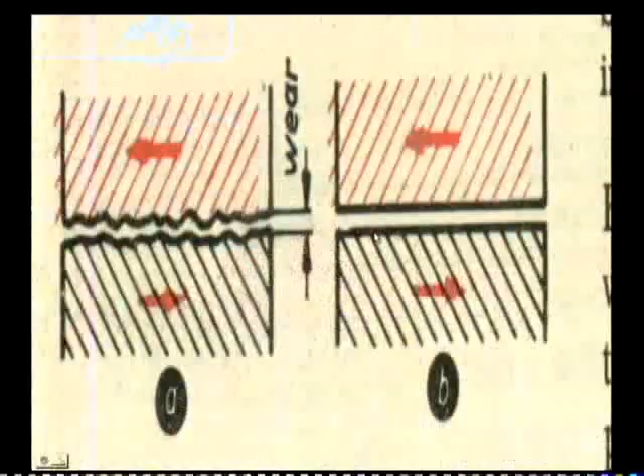That is why we have to switch over to some fine finishing processes after grinding. What are these processes? There are basically three types: lapping, honing, and super finishing. These bring excellent tolerance and accuracy, and also the type of fit required between the two parts. Let us study these processes one after another.

Now, lapping. Lapping is an abrading process used to produce geometrically true surfaces, correct minor surface imperfections, improve dimensional accuracy, or provide a very close fit between two contact surfaces. So lapping is basically a metal removal process, called an abrading process, that produces geometrically true surfaces — whatever trueness is required, be it flatness or roundness, is obtained, along with correction of minor surface imperfections.

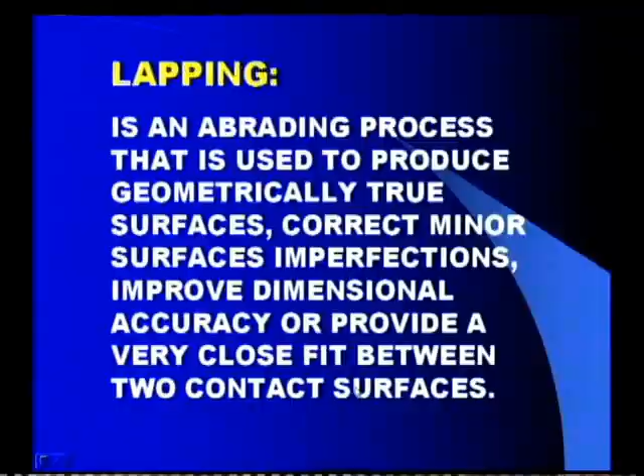The minor surface imperfections observed even after grinding, and also after honing which we will study a little later, including the marks left by the tool after honing, are corrected by lapping. It also improves dimensional accuracy and provides a very close fit between two contact surfaces. This is the application, or rather the advantage, of lapping.

Now what is obtained by lapping? Very thin layers of metal, about 5 to 10 microns, that is 0.005 mm to 0.01 mm, are removed in lapping. The lapping pressure is generally kept in a range of 0.01 to 0.2 newtons per millimeter square — a very small pressure applied by the lapping stone on the surface being lapped. That's how it becomes a fine finishing process.

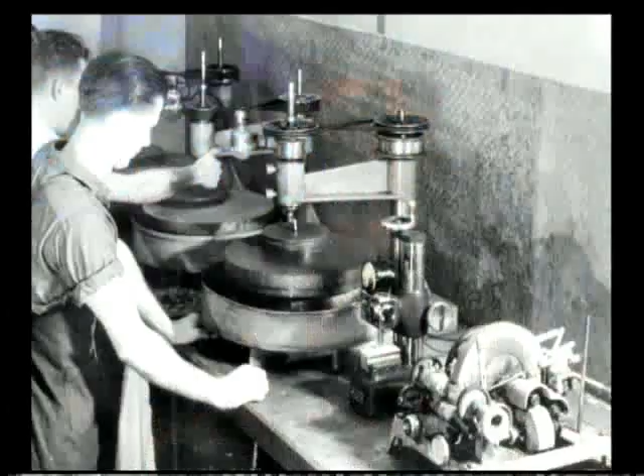Apart from this, there are also other advantages. You can see this figure where lapping is being done on a machine. This lapping tool may machine flat surfaces, or it may be applied on round surfaces also. In this figure you are seeing a flat surface being lapped; similarly, different surfaces can also be lapped.

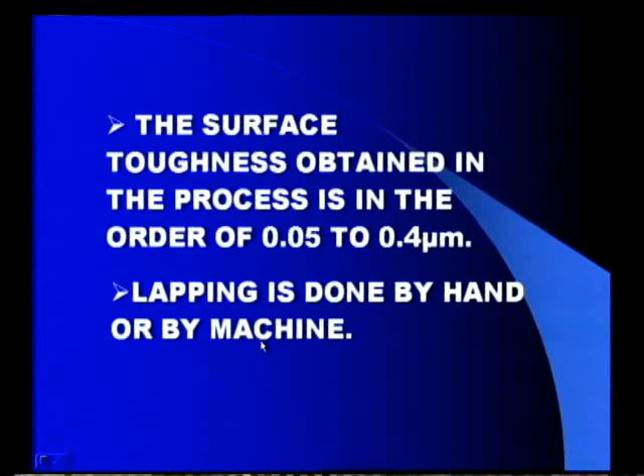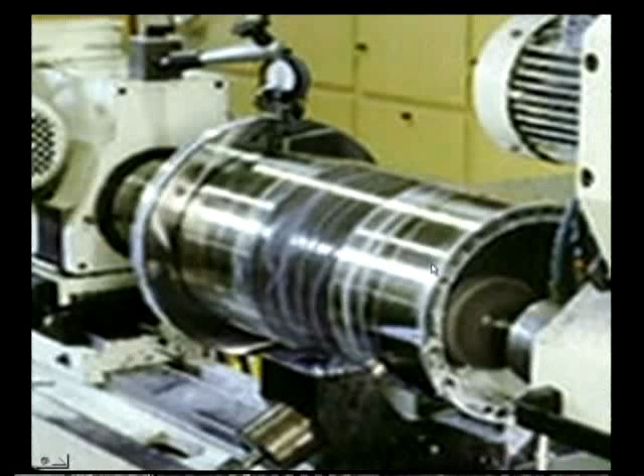In this figure, the cylindrical workpiece is getting lapped using a lapping stone, applied on and off onto the surface. The workpiece rotates while the lapping stone is applied, with two types of feed given: longitudinal and cross feed. This is how cylindrical parts also get lapped on machines.

These are some of the advantages you can observe on a lap. The first advantage is that less heat is generated, and hence there is no distortion of the work surface after lapping.

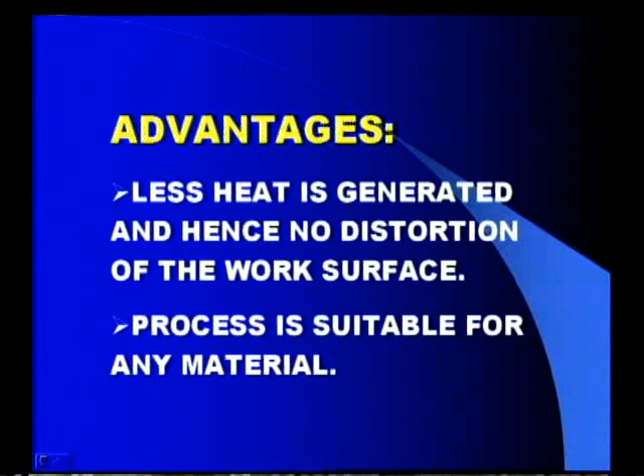The second advantage is that the process is suitable for any material - ferrous, non-ferrous, ceramics, or any non-metallic object - which can be lapped to a very close tolerance. This is how lapping is required for very fine accuracies.

Now what are the disadvantages of lapping? The process is very slow and the metal removal rate is very low - only a very small amount of material is removed, which is why it is only used for correcting surface imperfections.

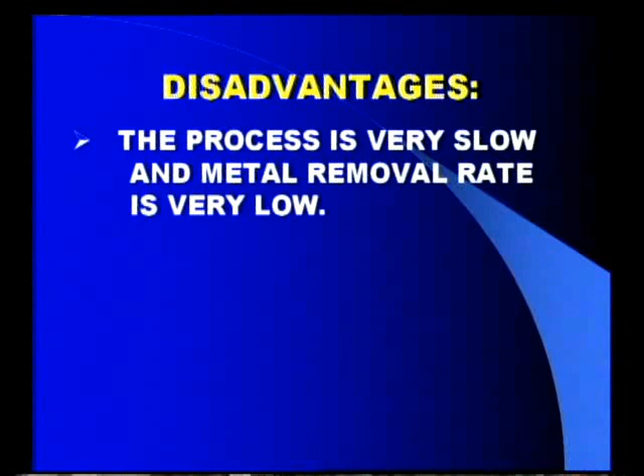The material allowed to be removed is only about 0.015 mm. That is the extent of machining allowance available in lapping. The second disadvantage is that machining allowance amounts to only 0.01 mm, so this is the only material available for us to create the required surface.

So you should understand that lapping is not a process for correcting out-of-roundness or axial or radial runout. It is only a surface corrective action observed after grinding and after other fine finishing processes like honing.

The third disadvantage is that hand lapping requires very high operator skills, because only a very small amount of material remains for achieving the required structure.

The process cost is also very high, because of tooling cost, machine cost, and as the machining allowance is very small, the strain on the operator - all contributing to a very high cost. These are some of the disadvantages of lapping.

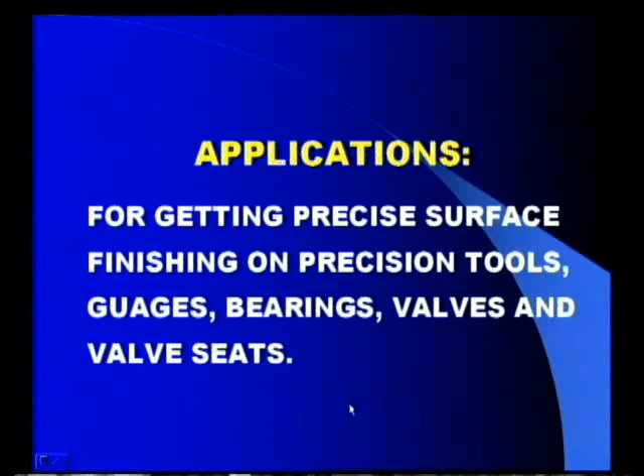Now where is lapping actually applied - the applications of lapping. For getting precise surface finishing on precision tools, gauges, bearings, valves and valve seats. All precision tools require finishing by lapping, all surface gauges or any kind of gauges require lapping, and bearings and valve seats are areas where lapping is extensively used.

You can see this photograph of plates used in the manufacture of our CDs, compact discs - you can see the glittering structure there. There is a close tolerance required to take out a CD from this die. These are actually dies used for the manufacture of CDs.

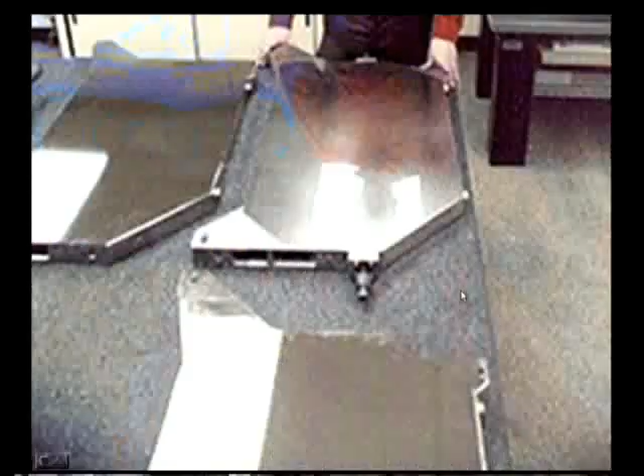You can also see this flat surface which is the result of lapping, showing the shining structure. All the fine finishing processes leave a shining, glittering or glossy structure after they work on the surface. So this is how we can discuss lapping.

Now coming to the second fine finishing process, that is honing. Honing is an abrading process mostly used for finishing round holes by means of bonded abrasive stones called hones. In lapping, the abrasive particles are freely embedded in the lap, which is usually a metallic or non-metallic material like fine-grained cast iron on which abrasive particles are embedded.

In lapping, the abrasive particles are freely embedded, but in honing they are bonded - using bonded abrasive stones. This indicates that in honing the expected material removal is high, therefore the material allowance also is high. So honing, compared to lapping, removes more material. These bonded abrasive stones are called hones.

These hones are used exclusively for machining internal operations like holes. It is the best process for finishing holes. So this is how we can understand honing.

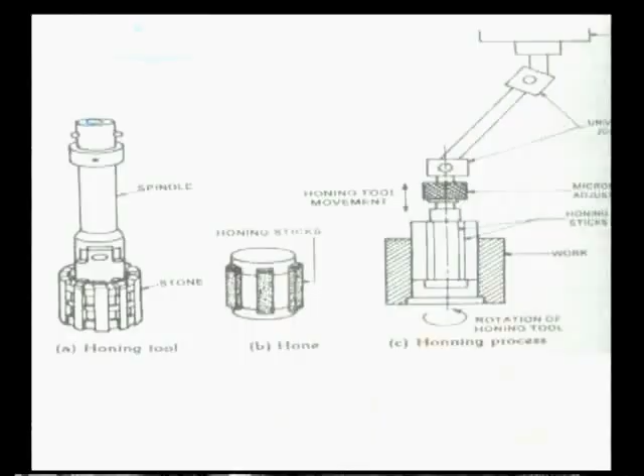See this figure. This honing tool has a spindle, and these are honing sticks, or honing stones, supported by guides. All may be stones, or all may not be, depending on different applications. Sometimes the stones are interlocked so you see all the stones in one fashion. If separated, you have some number of stones and the remaining are guides, which guide these honing stones. So you can see this honing tool is used for correcting internal features.

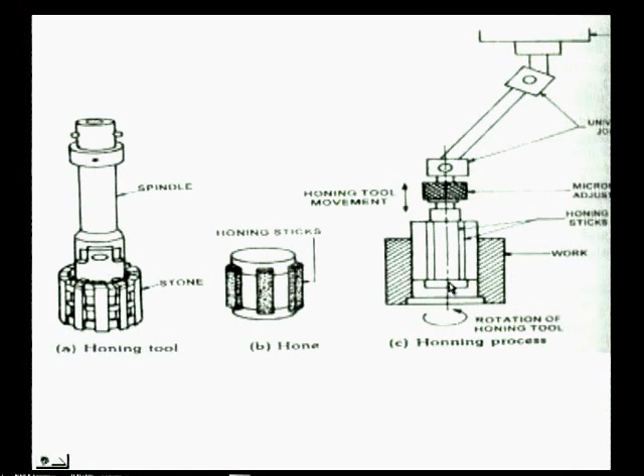Now in figure B, this is how you can observe a hone. These honing sticks are of various sizes and cross sections. This figure correctly shows us how honing is done. This is a telescopic shaft for correcting the ply, or if the operation is to be done a little away from the axis of the spindle, that is also possible with this telescopic shaft. This is the honing stick or honing tool, and this is the workpiece. The internal feature is getting corrected by using this honing. So this figure actually shows us how honing is done.

Now we can have a close look at the honing tool. Here you can see this honing stick, and this is a guide for the honing stick. Two are guides and one is a honing stick. These sticks may be brazed to the honing tool, and then they are used for the purpose.

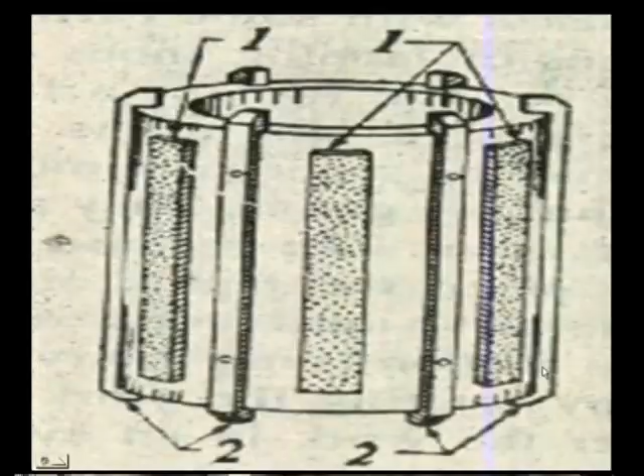Now what does this honing do? Depending upon the work material, honing speed may vary from 0.25 to 1 meters per second. So depending on the composition of the work material, the honing speeds will vary, the minimum being 0.25 meters per second to 1 meter per second. 0.1 mm of material can be removed from the surface. Compared to lapping, where only 0.01 mm of material is allowed to be removed, here 0.1 mm of material can be removed from the surface.

The honing process pressure is in the range of 1 to 3 newtons per mm square. The pressure applied in lapping is 0.02 to 0.05 newtons per mm square, whereas in honing the pressure is a little higher, between 1 and 3 newtons per millimeter square.

The surface roughness obtained is in the order of 0.1 to 0.8 microns, which is very less compared to lapping. So the surface roughness is between 0.1 to 0.8 microns. Sometimes honing also needs lapping. This is what we have to understand.

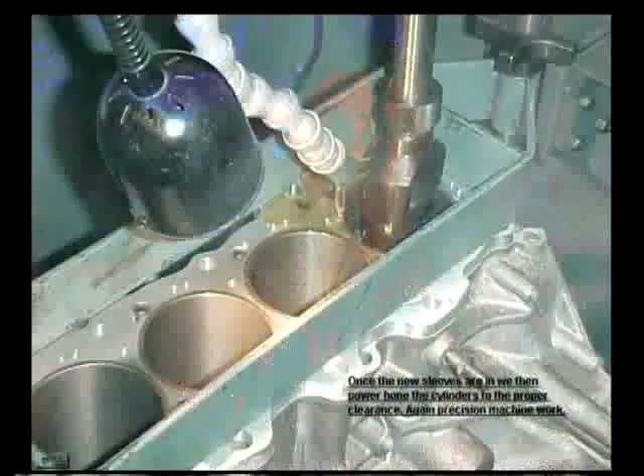Now in this particular diagram you can see how the cylinders of an engine are getting honed. These are the cylinders and this is the honing tool. Some lubricant is also used there, and this honing tool is correcting the cylinder bore. So one after the other, the cylinders are getting corrected. So this is the diagram.

Here it is written: once the new sleeves are in, we then power hone the cylinders to the proper clearance - again precision machine work. So once the cylinder comes into action, the honing tool comes and does the action, and then the next cylinder comes. Depending on the number of cylinders, all the cylinders can be machined. So that's how we can understand by this diagram how honing is done.

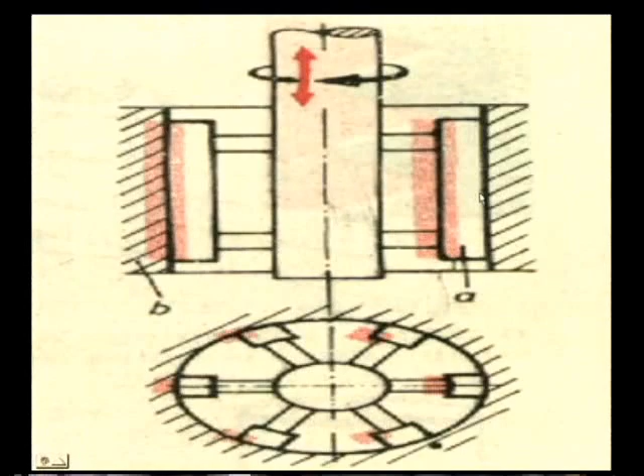This is another line diagram showing us how honing is done. This is the honing tool and the feed is given to the honing tool. The honing tool is reciprocating, and this is the workpiece. These hones are fixed to the honing tool, and there is a spring action between the two. It automatically corrects the distance between the workpiece inside diameter and itself. That is the reason why in most cases we use telescopic shafts for honing. So this is the top view of the honing tool working in a hole.

Now this is another diagram where a honing tool is used. This is a workpiece, this is a honing tool rotating, and the feed is given.

By this diagram also we can understand how honing can be done.

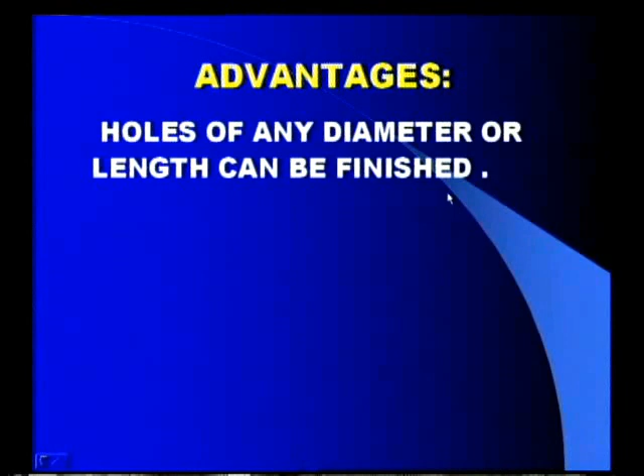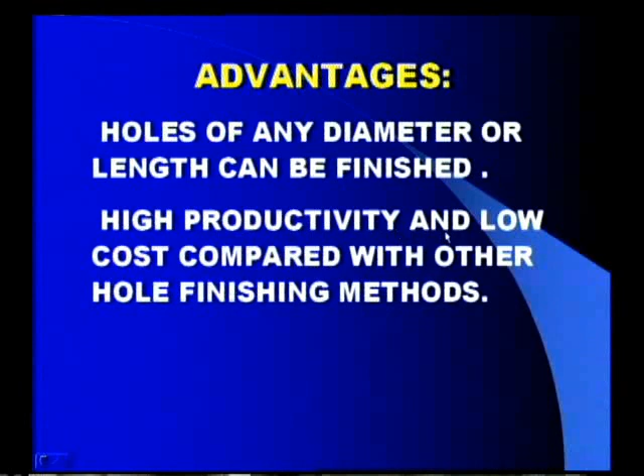Now the advantages of honing. The first advantage being, holes of any diameter or length can be finished, so there is no restriction on either diameter or length of the part. The second advantage being high productivity and low cost compared with other hole finishing methods. With least strain and input we can get higher amount of output, that is productivity, and low cost compared with other hole finishing methods. Especially when it comes to hole finishing methods, honing is the best one to be selected. It is faster and more accurate than internal grinding. Internal grinding also is a fast process, but honing is even more faster and more accurate.

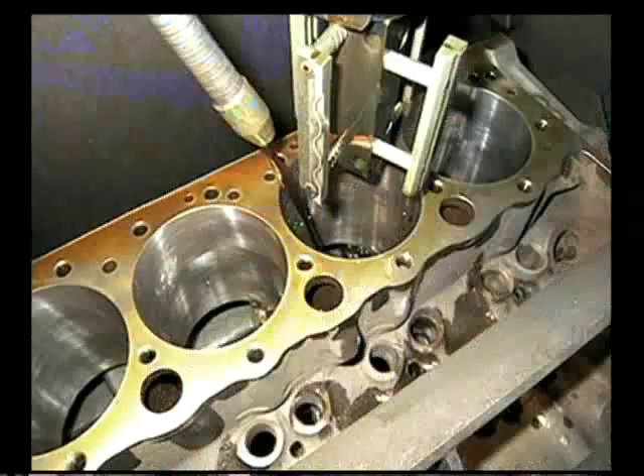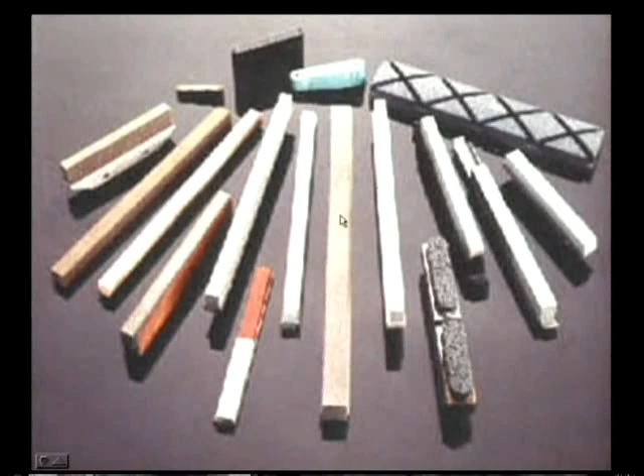This particular diagram shows us again how honing is done. You can see in this diagram very clearly, these are the honing sticks. They are fixed to the tool, and these honing sticks get inside the hole, this is a lubricant, and they automatically adjust in the hole. There is a spring action, or the telescopic shaft creates such correctness, and thereby the machining is done by rotating this tool, with feed given up and down. That's how especially the cylinders of IC engines, or any other round surfaces, will be honed.

Now in this diagram you can see various types of honing tools, honing sticks rather. They come in various sizes, as you can see.

Now in honing the material removal is more. That is the reason why, as studied in grinding, for very small material removal the grit size should be very fine, like about 500 to 600 grain size. For removing very high amounts of material, the grit size should be reduced. This is also applicable to honing sticks and lapping sticks.

Now the disadvantages of honing. It is not suitable for honing tough non-ferrous metals due to glazing or clogging of the pores of the abrasive sticks. The abrasive sticks get clogged by the non-ferrous metals, which are usually soft, yet tough from that category. So honing is not applicable for tough non-ferrous metals. They usually glaze or clog, meaning they get embedded, it's something like tool clogging. That is the reason this is not applicable on tough non-ferrous metals.

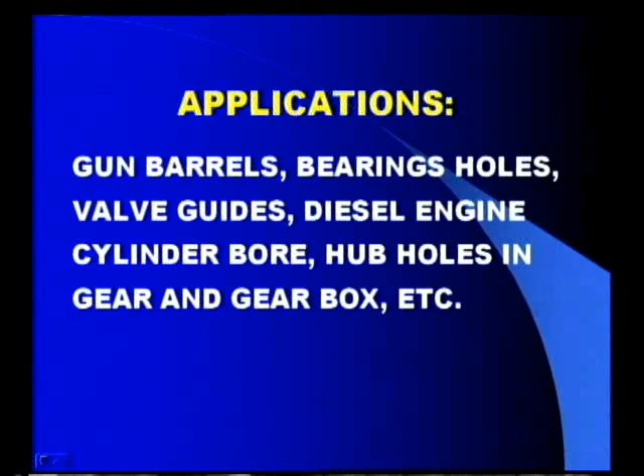That is the only disadvantage, except that all are advantages. The applications of honing: gun barrels, bearing holes, valve guides, diesel engine cylinder bore, hub holes in gear and gearbox, etc. If you closely observe all these, it is nothing but an internal feature. Gun barrels, valve guides, all these are internal features.

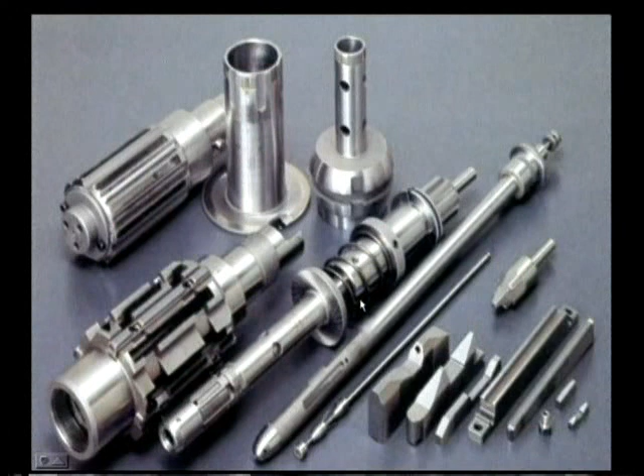This diagram shows us how the part looks after honing, the internal honing done here, so the parts can now be observed. In this diagram, various honing tools can be seen. This is a photograph depicting various honing tools, various equipment required for fixing the honing stick. You can also see the honing stick here, and various accessories required for fixing this tool to the spindle.

Now what is super finishing action? That is the next topic after honing. Super finishing action can be understood as an operation using bonded abrasive stones in a particular way to produce an extremely high quality of surface finish, in conjunction with an almost complete absence of defects in the surface layers.

The peculiar phenomenon observed in super finishing is that the stick, where very fine grit is used as an abrasive, when applied onto the surface, conforms to the surface features. That is the advantage of super finishing: the stick automatically conforms to the complexity or feature of the surface. So super finishing is again obtained by using an abrasive stick.

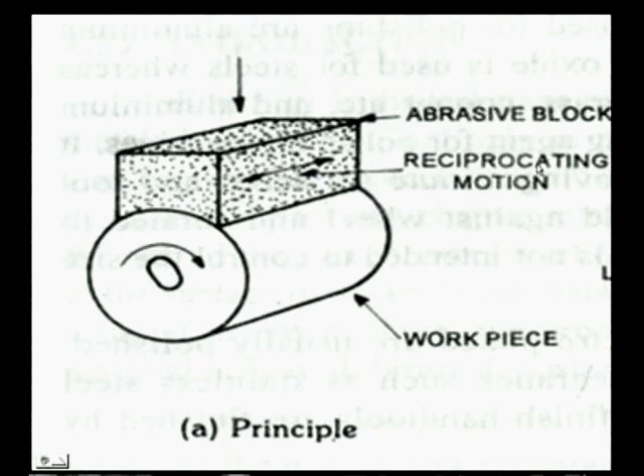So this is a simple principle of super finishing. Here in this diagram you are seeing a cylindrical surface, and in this diagram flat surfaces are getting super finished.

This is another diagram showing us how the pressure is applied. The pressure here may be hydraulic pressure or spring pressure, so any form of pressure can be applied here, and this is the workpiece which is getting super finished.

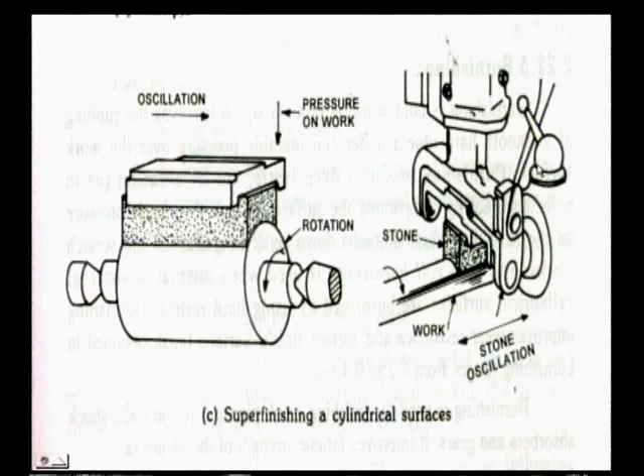This is a machine fixture showing us how the stone is fixed and how the pressure is applied by using a lever onto the work surface. So these are all various arrangements for taking up the super finishing.

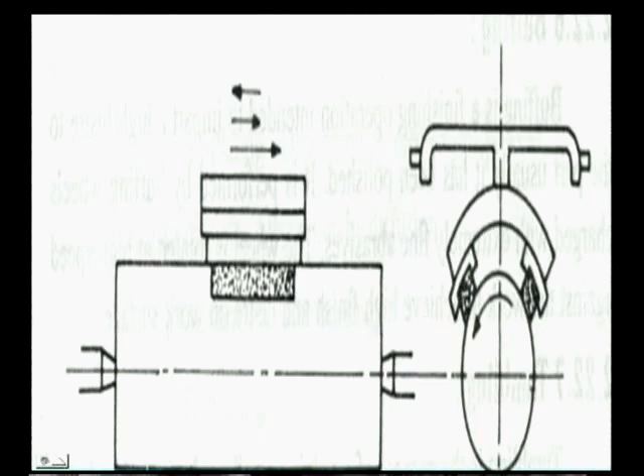This diagram also shows us how more than one super finishing stick can be used. Here you can see in the end view there are two sticks which are in use. They have to reciprocate in a to and fro motion on the cylindrical workpiece, and by this way you can reduce the machining time or super finishing time.

Let us now go into further details. A very thin layer of material is removed, about 5 to 20 microns, that is 0.005 mm to 0.02 mm. It is used to obtain very high surface finish of the order of 0.05 to 0.2 microns, so a glittering structure is obtained. The material removal is very small, and hence the surface quality also will be very high.

Parts made from cast iron, steel or non-ferrous metals can be super finished, so super finishing can be applied to almost all materials. So these are some of the details.

Now, a very fine grit abrasive is used in super finishing. The very fine grit is required because it is removing a very small amount of material, therefore it is a finishing action.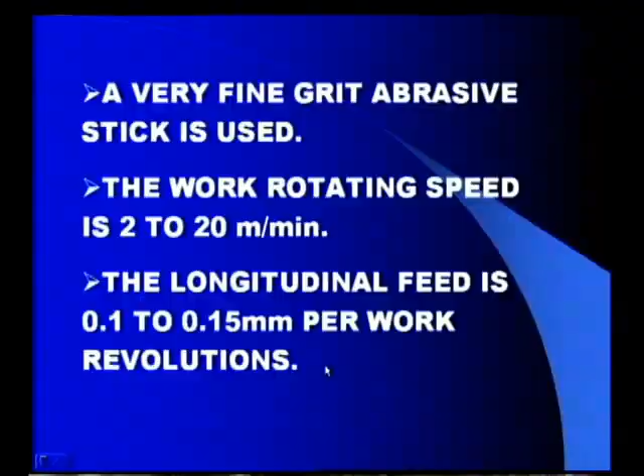The longitudinal feed is 0.1 to 0.15 mm per work revolution, so a very small amount of feed is given for every work revolution. The number of work revolutions can be between 400 to 500, 800 rpm or even more than that. So this is how the super finishing can be done.

Now, the applications of super finishing. It is used for finishing computer memory drums, sewing machine parts, automobile cylinders, brake drums, bearings, pistons, piston rods and clutch plates. So almost all engineering parts require super finishing action, especially when they are used in very complex situations, they need to undergo super finishing action.

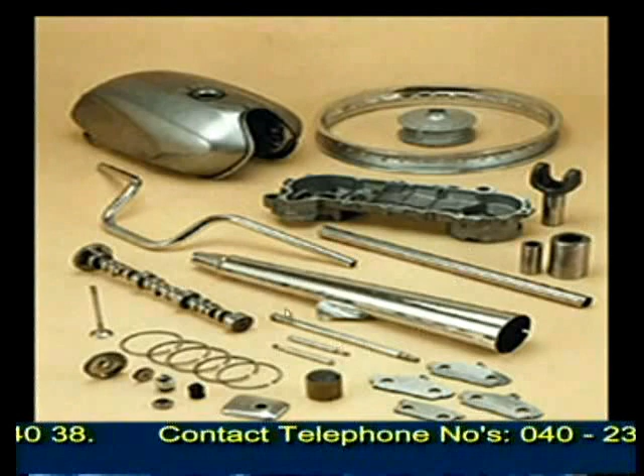Here is the diagram showing us how the parts are observed after super finishing. You can see all these parts are required for an IC engine. These are piston rings you can see here, and these are gaskets, and this is the casing, this is the rim. So all these are super finished before they are assembled.

Now, the surface coatings. What do you mean by a surface coating? The glittering structure is obtained after super finishing, honing and lapping, but there are some characteristics that need to be obtained on the surface. Keeping that in mind, some surface coatings are also required.

Let us go into those details. So what is a surface coating? It is a surface finishing which improves the quality and appearance of the surface of metallic objects.

Surface coating not only improves the quality, but also brings an appearance to the surface. That is the advantage of surface coating - an aesthetic sense, an aesthetic look is obtained. The surface appears very much attractive, and that is what is called the appearance of the surface, obtained by surface coating methods.

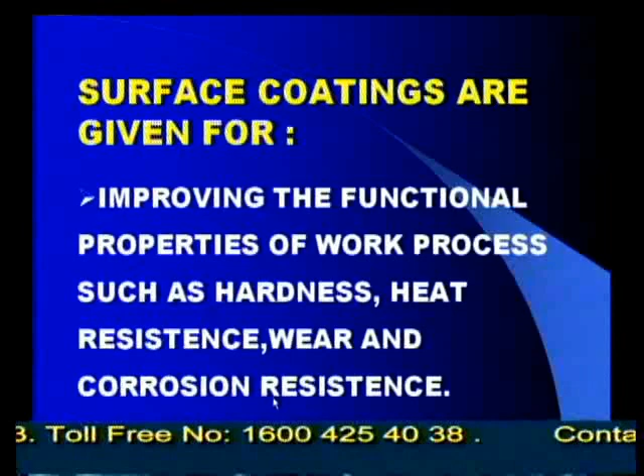Now what are these surface coatings given for? What are they applied for? We study about them. They improve the functional properties of work pieces such as hardness, heat resistance, wear and corrosion resistance. It not only increases the hardness, it provides heat resistance, wear resistance, and corrosion resistance. All these properties are obtained by surface coatings.

It also provides a decorative as well as fine finish to the metal surfaces, giving a final decoration or embellishment to the surface. It can also help rebuild worn or undersized parts - surface coatings can bring good appearance, so worn out parts or parts which are to be rebuilt can also be subjected to surface coating processes.

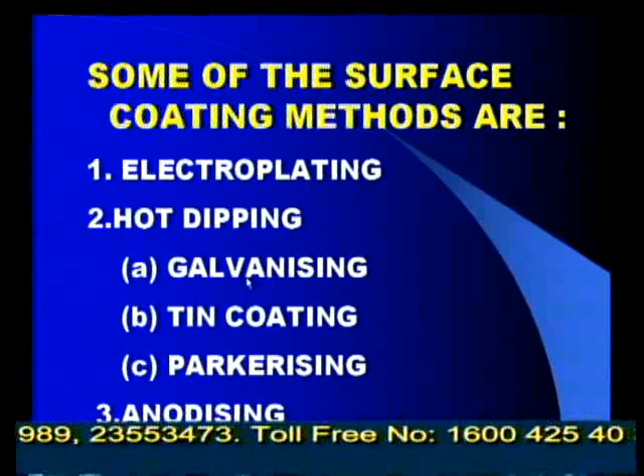Some of the surface coating methods are electroplating, hot dipping - under hot dipping you have galvanizing, tin coating, and Parkerizing - and the third is anodizing. Then we have metal spraying, which again includes the wire method and the powder method. These are some of the surface coating methods.

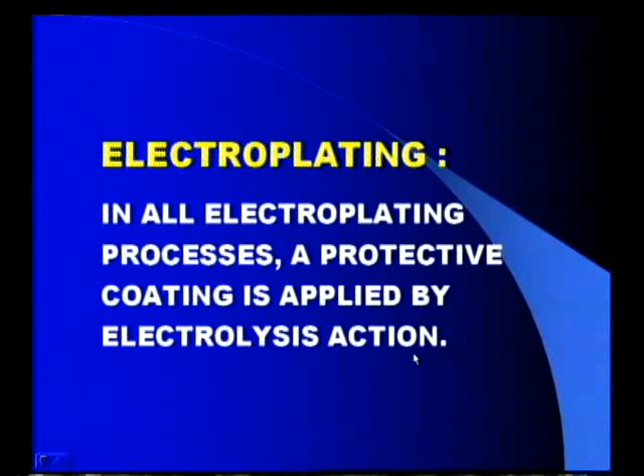Now we firstly study about electroplating. What is electroplating? In all electroplating processes a protective coating is applied by electrolysis action. It mainly depends on the theory of electrolysis.

The material of the substance that is going to be deposited depends on the current density flowing through the electrolyte. That is how the law of electrolysis is defined, and based on this law the electroplating is done.

Now, when current density is applied, AC or DC can be used, but usually DC current gives good results with deeper penetration. That is why DC is used extensively.

When DC current flows through the electrolyte, the electrolyte releases silver ions. Being positive ions, they are attracted to the cathode and deposit there, losing their charge when they touch the surface and depositing as silver particles. To balance the concentration of the electrolyte, silver ions from the silver plate get embedded and pass into the solution. This is how the concentration of the electrolyte is maintained.

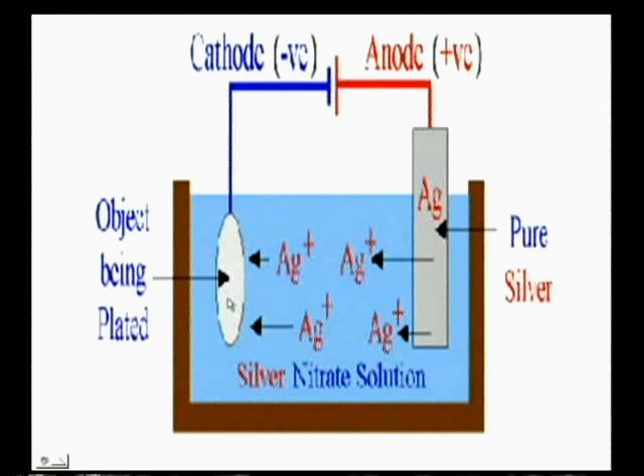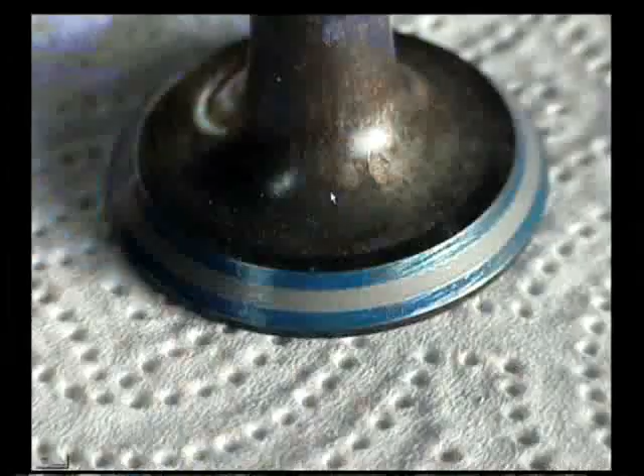Another advantage of electroplating is that complex parts can also be coated. This is a valve, you can see it getting electroplated at the end - it has a very shining surface, and its appearance is excellent. You can see various complex objects here, all different in shape from one another, all getting electroplated. This is the result of electroplating - the surface is coated with that material.

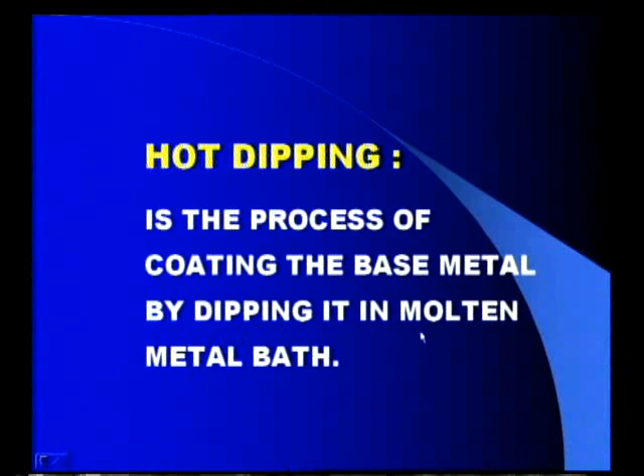Now what is hot dipping? In this process, the base metal is coated by dipping it in a molten metal bath. The part to be coated is dipped in the molten metal bath, thereby the material is deposited on the surface of the plate.

The first method is galvanizing. What is galvanizing? It is the process of producing a zinc coating on iron or steel by dipping, that is, by immersion of iron or steel articles in a molten bath of zinc.

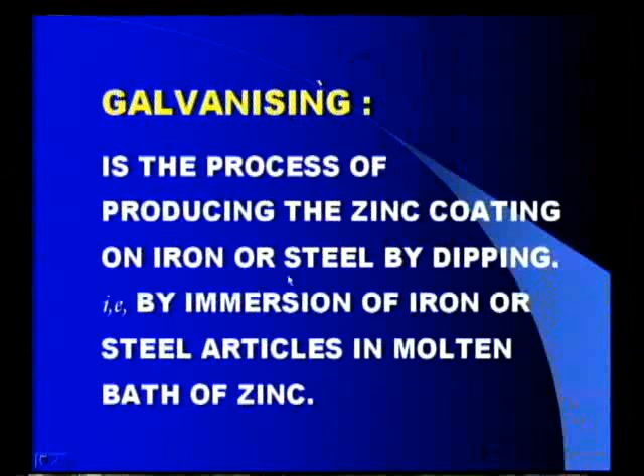So the zinc bath will be there, and in that bath the steel or iron parts are dipped or immersed. Depending on the time and also the temperature of the bath, the required coating is obtained. So this is how galvanizing can be defined.

Further details: the work surface must be cleaned by pickling. Before the part is subjected to galvanizing, it must be cleaned thoroughly. Pickling is nothing but dipping it in a suitable acid for removing and degreasing the surface. After pickling the parts are fluxed by immersing the material in a solution of zinc chloride. The parts must be fluxed, otherwise oxidation takes place.

This flux favors or creates the environment whereby the coating material gets deposited on the plate very effectively. These are the advantages of using a flux. The articles are dipped in the molten bath at about 450 degrees centigrade. So this is how, in steps, galvanizing is done.

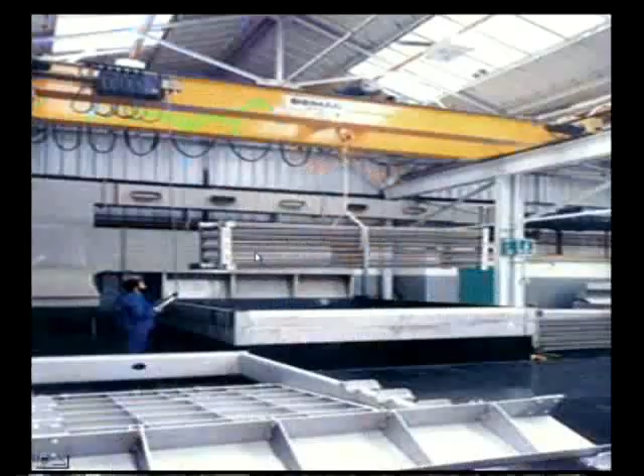Pickling is very much required, so the basic process of pickling you can see here. Here are some sheets being dipped in a suitable acid, usually sulfuric acid or hydrochloric acid, used for removing any dust and grease particles on the surface of the plates. These are plates which are dipped and subjected to pickling.

Now, the thickness of the coating layer is controlled by time and temperature. In this hot dipping method, the more the time, the higher will be the thickness. But when kept for very high time, the material becomes brittle, making further bending and forming of the coated part difficult. Therefore, there is a restriction on the upper side of time and temperature, so correct time and temperatures are chosen for the required application.

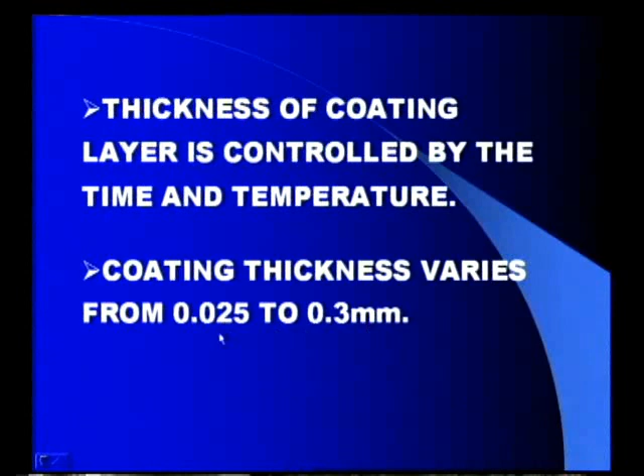Coating thickness varies from 0.025 mm to 0.3 mm. Some industries like Uttam Galva Steels provide a tolerance of about 20 microns within this range. If this is the coating thickness required, they are able to provide it within a tolerance zone of about 20 microns - that is their greatness.

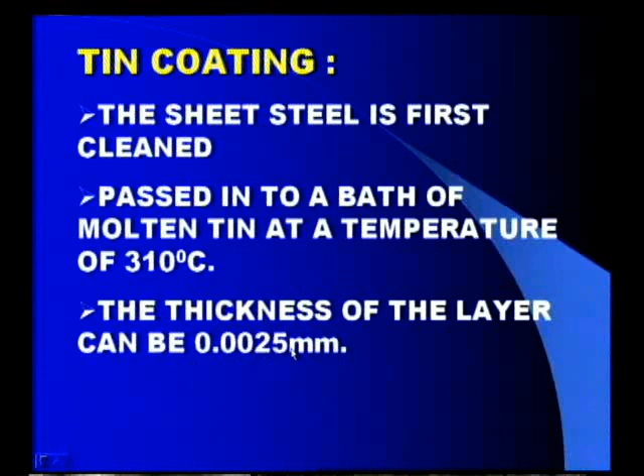Now, tin coating. What is meant by tin coating? The sheet steel is first cleaned. Before the sheet is to be tin coated, it is to be cleaned. Then it is passed into a bath of molten tin at a temperature of 310 degrees centigrade. The thickness of the layer can be 0.0025 mm.

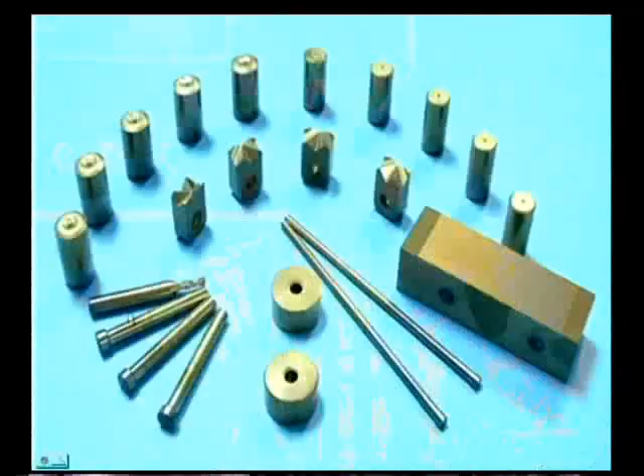Usually, tin coating is obtained for food preservation, which avoids any contamination of the inside surface and poisoning effect on the food. This is how tin coating is exclusively applicable for food containers and tins where food is preserved, and it is also employed for cans for food and kitchen utensils. You can see some of the parts coated by tin.

Now, parkerizing. What is parkerizing? Parkerizing is a process of providing phosphate coating on the work surface by hot dipping. This phosphate coating serves as a base for enamel and paints. Sometimes we need to paint a particular surface with enamel, varnish, or an organic coating. This action called parkerizing makes the surface suitable for further organic coating - that is the purpose of parkerizing. So before painting a particular surface, we need to take up this parkerizing process.

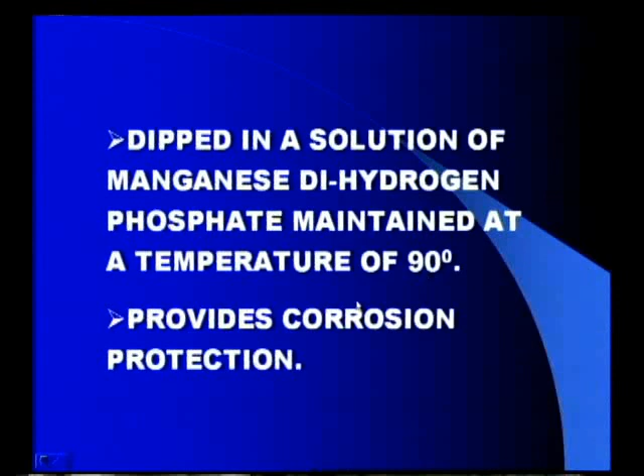You can see this diagram. In parkerizing, the part is dipped in a solution of manganese dihydrogen phosphate, maintained at a temperature of 90 degrees centigrade. This provides corrosion protection to the surface, and the further organic coating gives an aesthetic and attractive appearance. So this is how we can understand this coating.

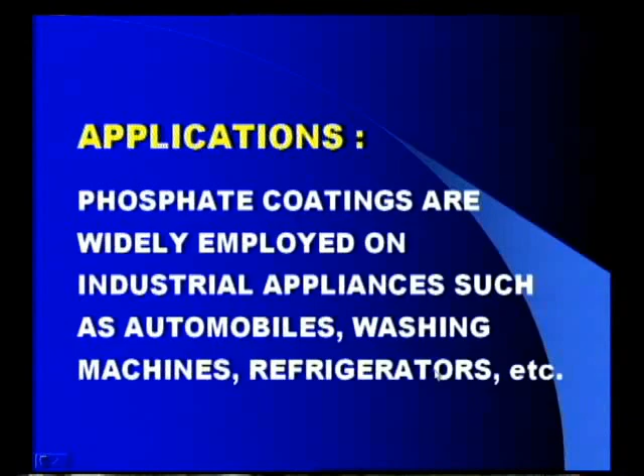Now, what are the applications of parkerizing? Phosphate coatings are widely employed on industrial appliances such as automobiles, washing machines, and refrigerators. When refrigerators are built with galvanized sheets, you can subject them to phosphate parkerizing before they are painted. Similarly, for automobile outer covers and washing machines, parkerizing needs to be applied.

This makes aluminum suitable for further action, like transforming it into furniture form or applying painting on it. So it is used on aluminum both for decoration and for protection of the base metal.

The film is produced by electrochemical reaction. This is the basic principle involved in anodizing, whereby the film is produced on the surface of the part. Now you can see this diagram.

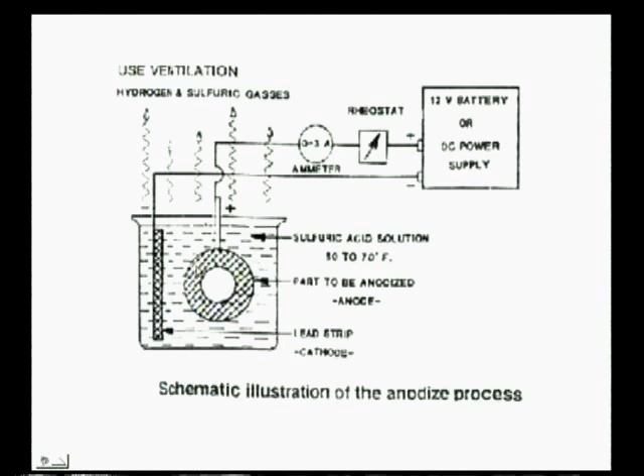In this diagram, the part to be anodized is in the form of a ring, and this is a lead strip. Both are connected to a DC power supply, and there is an electrolyte. When current passes through the electrolyte, it diffuses, and by this electrochemical reaction, oxygen is formed on the surface of the anode - that is, the part to be anodized - so an oxide film is obtained on the aluminum.

The thickness of the oxide film and the rapidity of formation depend on the current density and temperature. Low temperatures favor getting more thickness. For example, at 3 degrees centigrade, about 0.15 mm of oxide film can be obtained. If the temperature is 30 degrees centigrade, no anodization takes place, so no surface coating is obtained - it should be less than 30 degrees. That is how at low temperatures we can obtain very high coatings on the surface of aluminum.

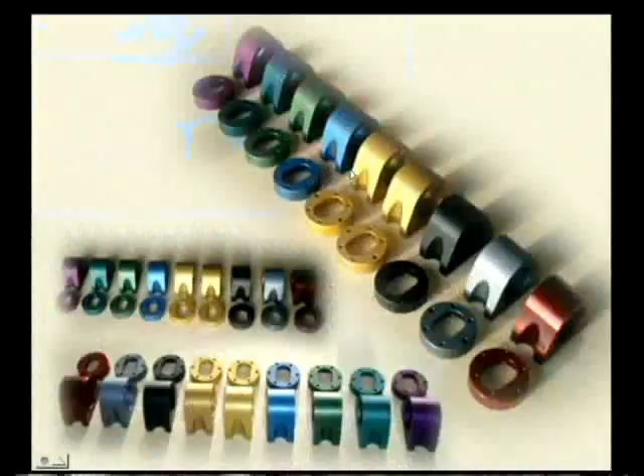So you can see in this diagram some results of anodizing. These are the parts - you can see the color, as some pigments are also added. These are different applications, and this is the result of anodizing.

Now let's understand the applications. Aluminum furniture and utensils are mostly applicable. This process is applicable to aluminum furniture, architectural shapes, fixture frames, and as a good base for painting, especially for aluminum, since otherwise aluminum painting is difficult. So before painting, it is subjected to anodizing.

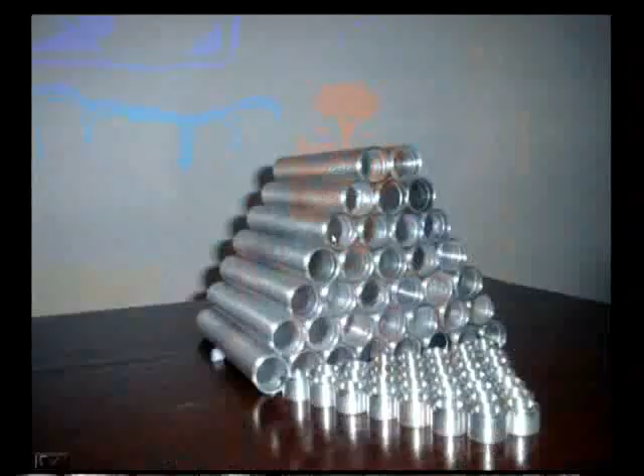Here are some diagrams showing the effect of anodizing. These are all aluminum tubes and aluminum discs, which appear like this after anodizing - and this is the diagram we have already discussed.

Now, metal spraying. What is metal spraying? It is used to furnish a protective coating on the base metal. The surface of the metal is coated with finely divided particles of metal, in diffused or atomized form, which get deposited on the surface of the part. That is what is done in metal spraying.

Metal spraying is done by melting a metal in an oxygen flame and blowing it from the nozzle of a spray gun. So in an oxygen flame the metal is melted and blown from the nozzle of a spray gun.

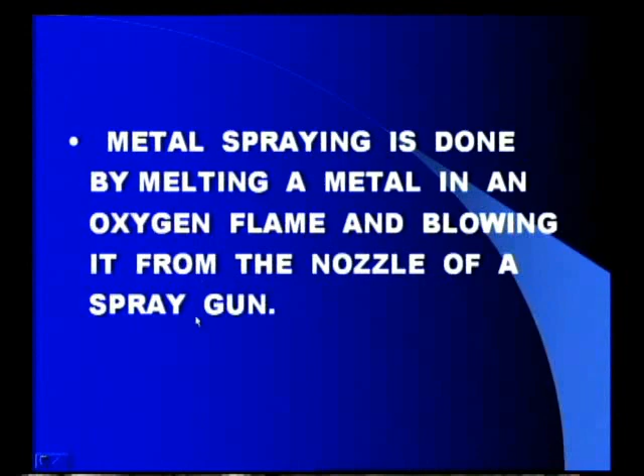So that is how, in an atomized form, the particles of this metal are getting deposited onto the surface of the part. Metal spraying is done basically by two methods: the first is the wire method, the second is the powder method.

In this diagram you can observe how the powder method is done. The powder, through a hopper, is fed to the area where compressed gas is released, along with a fuel gas for burning, through the nozzle. Here the fuel gas is combusted, and the powder is dragged by the aspirating gas, which is compressed air, and then thrown out in an atomized form as a spray stream onto the surface.

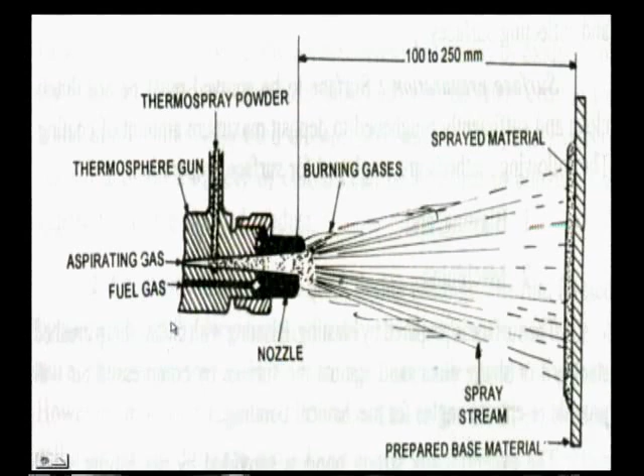Now you can see this is the coating sprayed material, and the background is the prepared material. This is how, in atomized form, it gets deposited on the surface of the part. This shows how powder metal spraying is done.

The wire method is mostly done because most metals used in metal spraying are available in wire form rather than powder form. Powder form is a bit costlier.

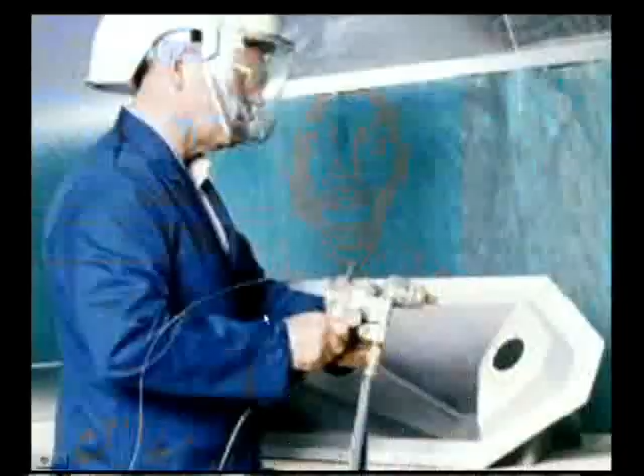Now this diagram shows us how metal spraying is carried out. He is just spraying the metal onto the part.

Now what are the applications of metal spraying? Aluminum and zinc are applied on iron and steel surfaces to protect against corrosion. Hard facing on soft material surfaces resists wear and abrasion. Soft material surfaces can be made hard by atomizing hard materials onto their surface, giving them resistance against wear and abrasion.

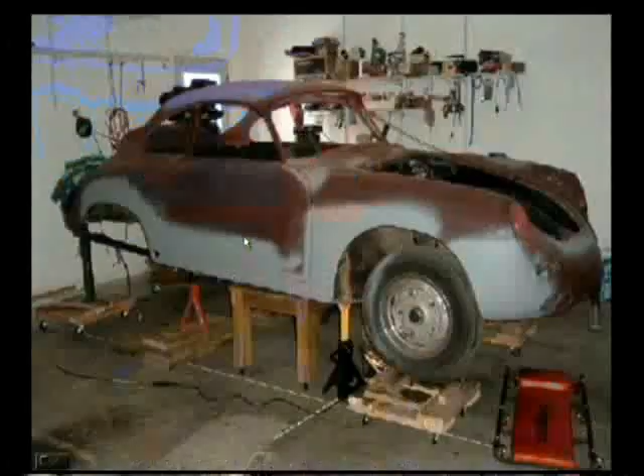This is a car which we are seeing, ready for metal spraying. After some time you can see in what form the car will be available to us.

Copper is sprayed on non-metallic parts to render them solderable and increase conductivity. See the excellence of metal spraying: non-metallic parts may be made conductive by spraying copper onto their surface to the required thickness, making them suitable for soldering and increasing their conductivity.

Now what is surface preparation? It is done by sandblasting and also by machining. This is very much required before the parts are subjected to metal spraying, as excellent surface finish is necessary before taking the part to metal spraying.

What is sandblasting and what is machining? Blasting is of two types: using fine grit sharpened metal particles, or using silica granules. If silica is used, it's called sandblasting; if metal is used, it's called metal blasting. Some machining action is also required. These are the two basic surface preparation methods we have.

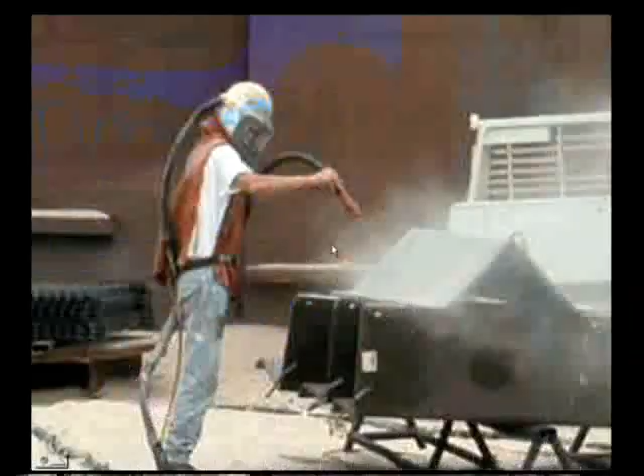Now in this case you can see this part is sandblasted. Using compressed air, the granules of sand are bombarded onto the part, thereby cleaning the surface. Here is another diagram.

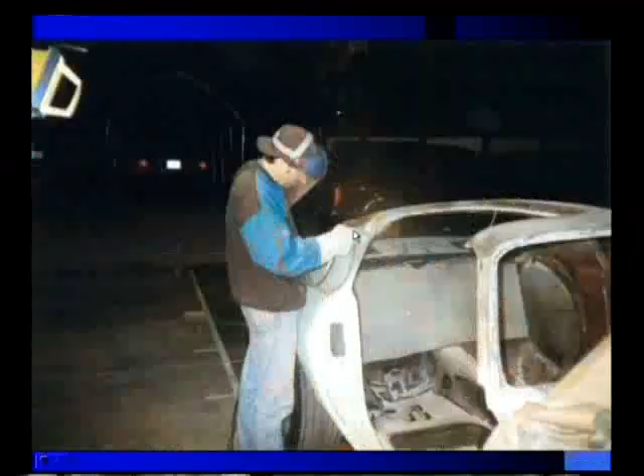Now these are basic surface cleaning processes.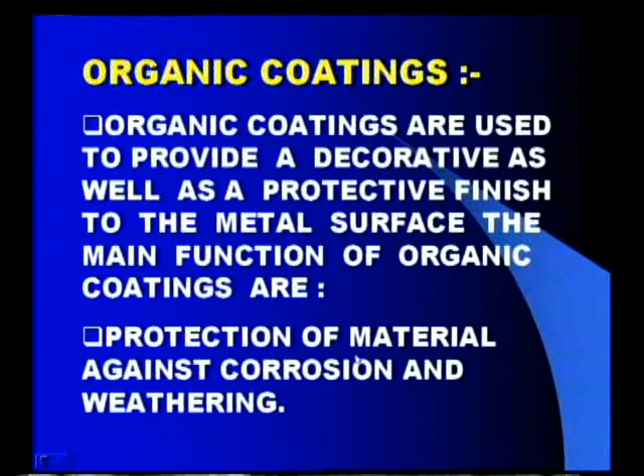Such organic coatings are very much required to be given onto the surface for getting the required characteristics. The organic coatings are used to provide a decorative as well as protective finish to the metal surface. The main function is protection of material against corrosion and weathering. Weather effects are nullified when you give an organic coating, and corrosion resistance is also improved on the surface. That is the excellency of organic coatings.

Some of the characteristics obtained from organic coating are improvement of visibility, so it is very clearly visible. Better reflectivity, the surface reflects. Improvement of appearance, so a very good, excellent appearance outlook is obtained. They also provide electrical and thermal insulation, so conductors can be given an organic coating whereby they can be made insulators.

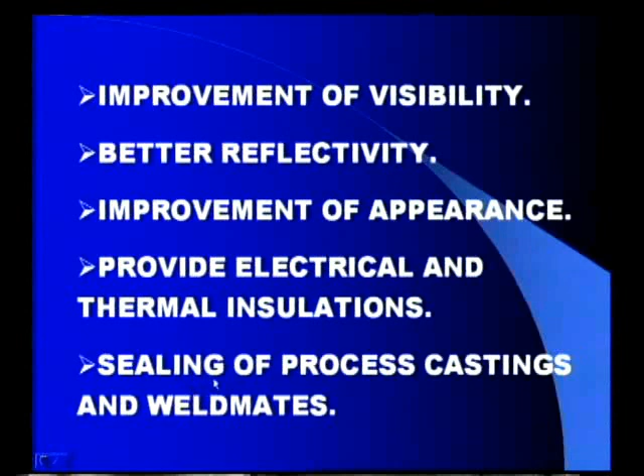Now what are the following materials widely used for organic coatings? The first one is oil based paints, second being lacquers, third is varnish, fourth one is enamels, and the fifth one is bituminous paints.

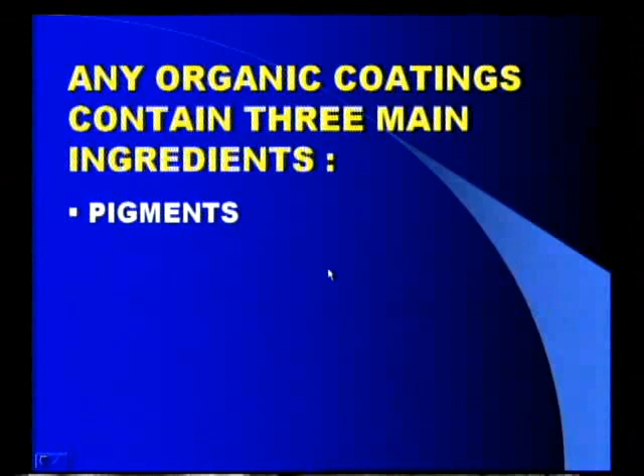Any organic coating contains three main ingredients. There are three ingredients mainly that you observe in any organic coating. What are they? The pigments, the vehicle, and the dryer. So what are these? Pigment, vehicle, and dryer.

Now the vehicle, what is a vehicle? It contains a binder that forms the film and holds the pigments. So the pigments which give color are to be held, and that holding action is done by the vehicle. The vehicle forms a bond between the pigments.

Now what is a dryer? It acts as a catalyst to harden the film after it has been applied. Once the film is applied on the surface, it is to be hardened and evaporated, leaving behind the pigments. So a dryer is also very much required, which is basically a solvent. That's how the three ingredients are required.

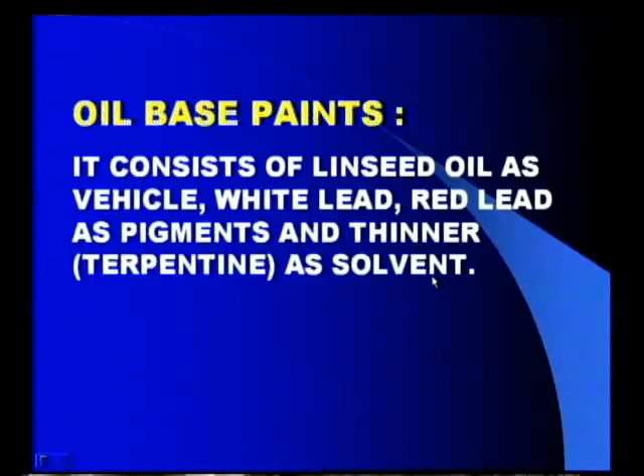Now we study about oil based paints. It consists of linseed oil as vehicle, which is obtained out of some seeds. White lead or red lead as pigments, and thinner, which is turpentine, a byproduct of petroleum, used as a solvent. So these are the three: vehicle, pigment, and solvent used in oil based paints.

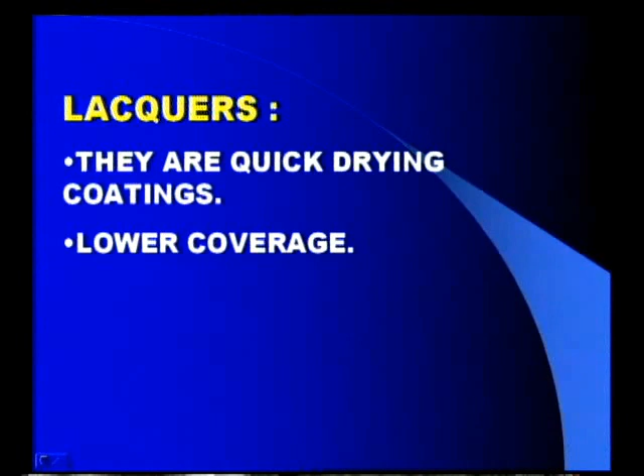What are lacquers? Lacquers are quick drying coatings. They have lower coverage, the coverage area will be very small, and the durability of the film is poor. Lacquers are nothing but solutions of film with a natural or artificial resin.

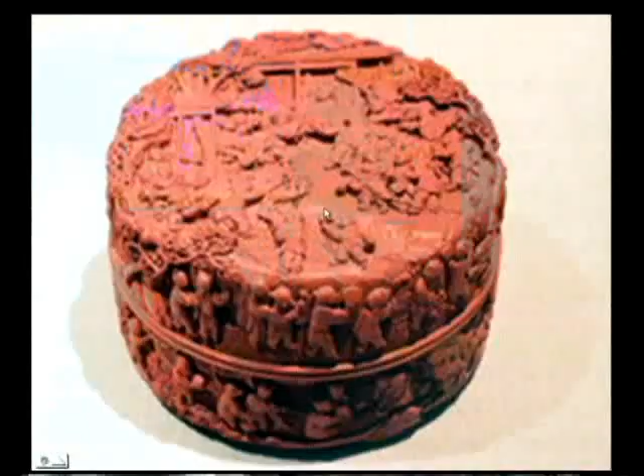So you can see in this diagram the final shape and appearance obtained after lacquering. You can see these are all the decorative parts, this is the result of lacquer. This is a lacquer gift box, where the color pigmentation is given. This is the result of lacquer. Now you can also see lacquer bottles, which are available for various applications.

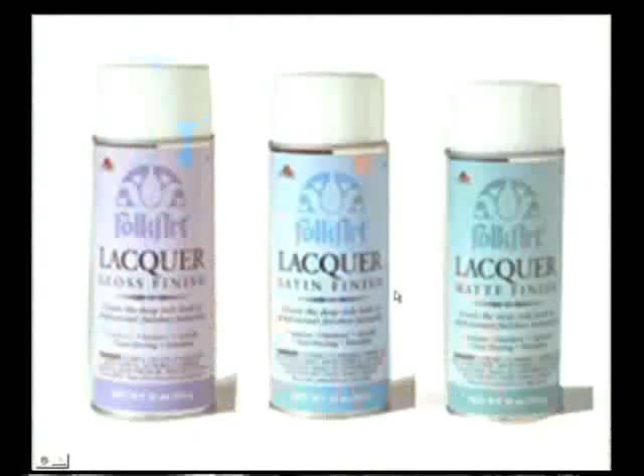Now varnish, what is varnish? It is a resin dissolved in oil and doesn't contain any pigments, that's why varnish is colorless. When pigments are there, you can get any type of color you want.

This is the resin where there are no pigments. It produces hard film which can give toughness and durability. It is used for vehicle finishes, so all vehicle finishes are obtained by a varnish. Varnish has been used since the Egyptian era for preservation of mummies - the boxes used had inside coating given by varnish. There are evidences that varnish has been used from antiquity.

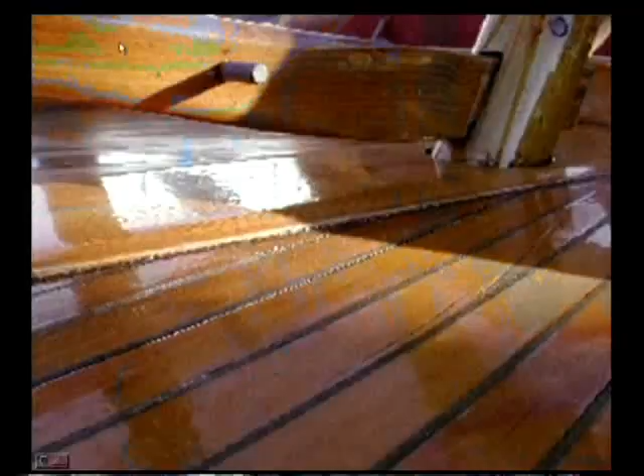Here are the diagrams where you can see varnish application. This is on wood after the varnish coating is given, this is how it appears, and this is another application on a boat made of wood. After varnishing, this is how the surface can be obtained, giving it aesthetic sense and also protection from water and from acids.

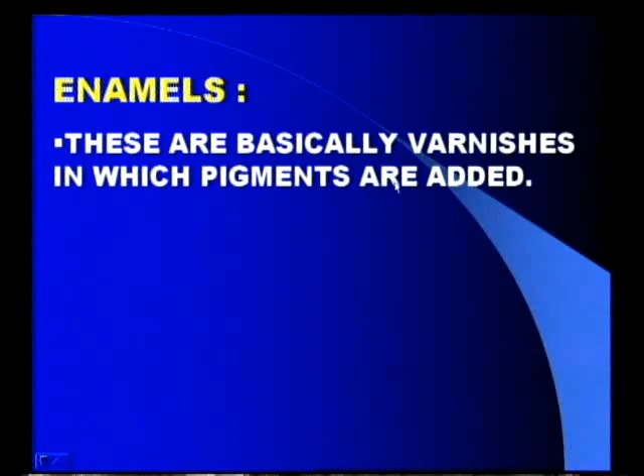What are enamels? Enamels are basically varnishes in which pigments are added. They provide a harder and more abrasive resistant coating, excellent resistance coating. So they are used on automobile parts, electrical and domestic appliances. These are the products made out of enameling.

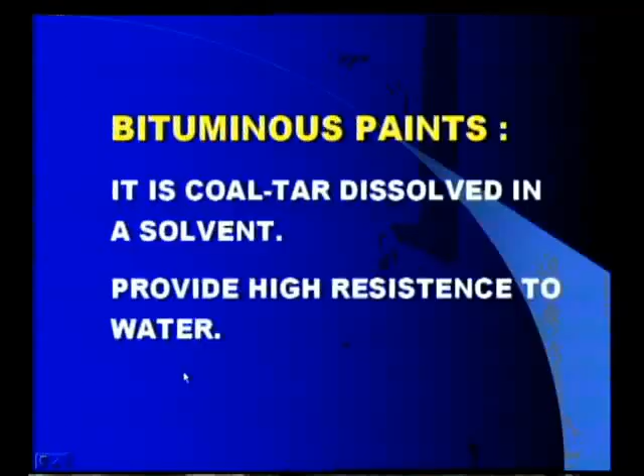Now bituminous paints. Bituminous paint is coal tar dissolved in a solvent - bituminous coal powder, called coal tar, dissolved in a solvent. Why is it required? It is required for providing high resistance to water. So where some parts are immersed in water for a longer time, corrosive problems take place, and there, for effective functioning, this bituminous paint is very much required.

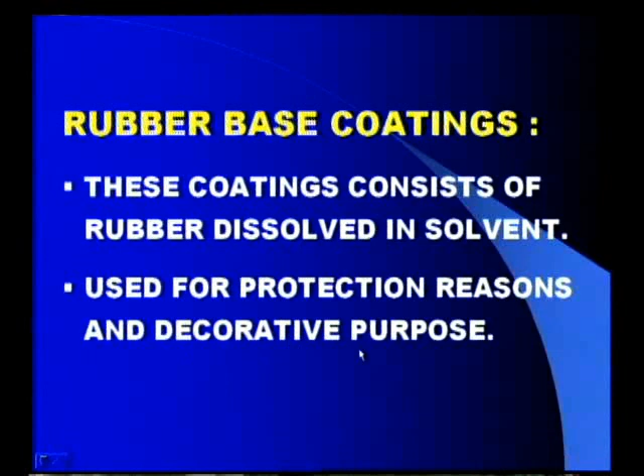Now rubber based coatings. These coatings consist of rubber dissolved in solvent, used for protection and decorative purposes. The important types of rubber based coatings are chlorinated rubber, neoprene, and hypalon - chlorosulfonated. Cellulose is the basic element used in chlorinated rubber, which has very limited colors and limited applications. But neoprene and hypalon have excellent applications.

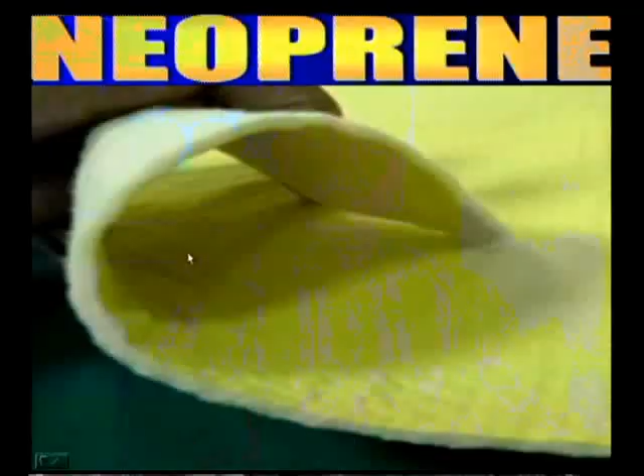Now you can see diagrammatically how neoprene is applied. These are all the cold boxes or bags given neoprene coating - neoprene is a kind of organic coating. This is a neoprene layer which has excellent hardness and can be subjected to even high pressures, so neoprene coating gives us hardness.